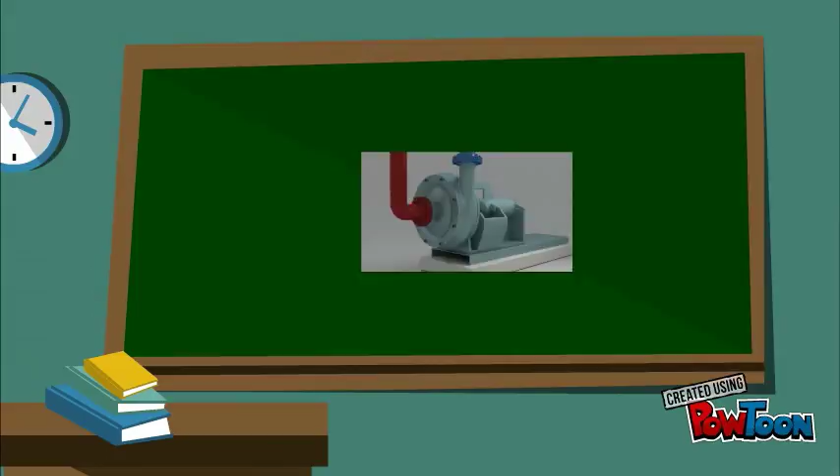First, we'll need a centrifugal pump, one like this used in most industrial applications. We're going to examine cross-sectional views so we can see just how this thing works.

Let's start with the parts of the pump. First we have the casing or volute, the eye or suction of the pump, the impeller, and the discharge pipe.

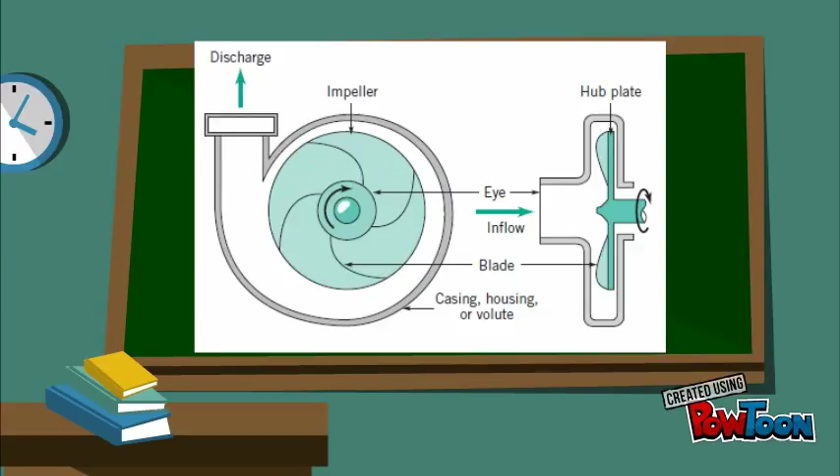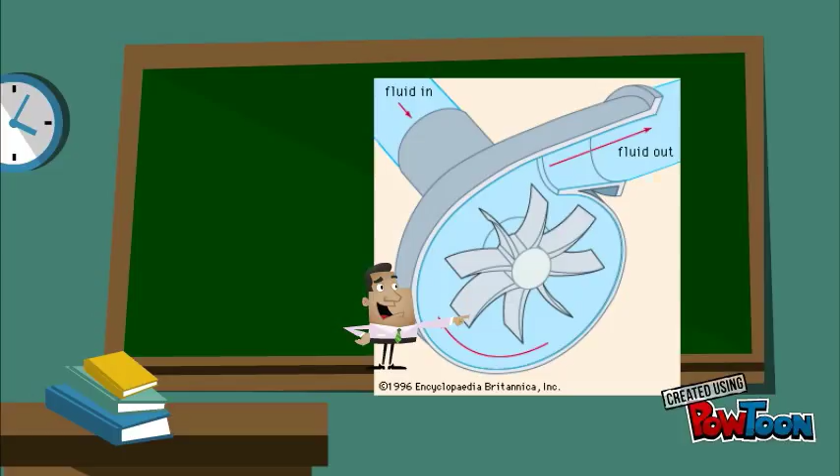For the basic operation, we see the fluid enters through the suction end here. Then it is pushed around the volute with the impeller here, until eventually it comes out here through the discharge end.

Let's look at pump theory. In this cutaway drawing, we can see that the fluid enters the suction pipe here and is forced to the outer casing here. You can see that the distance between the impeller and the casing gradually increases in size as the fluid travels around the volute.

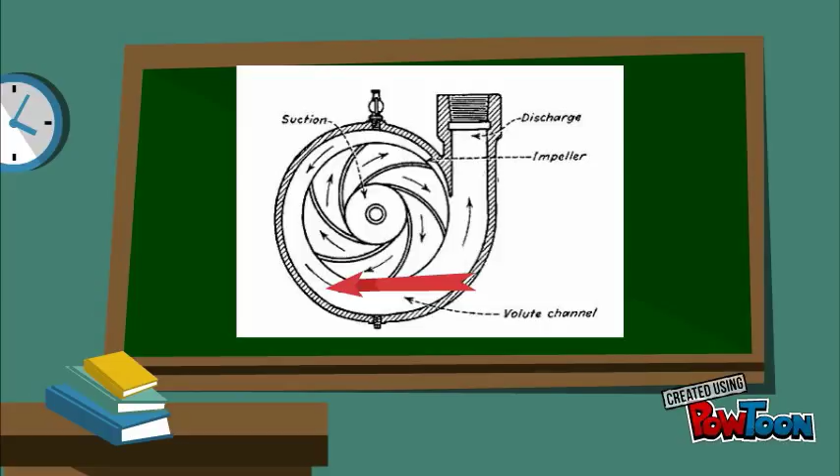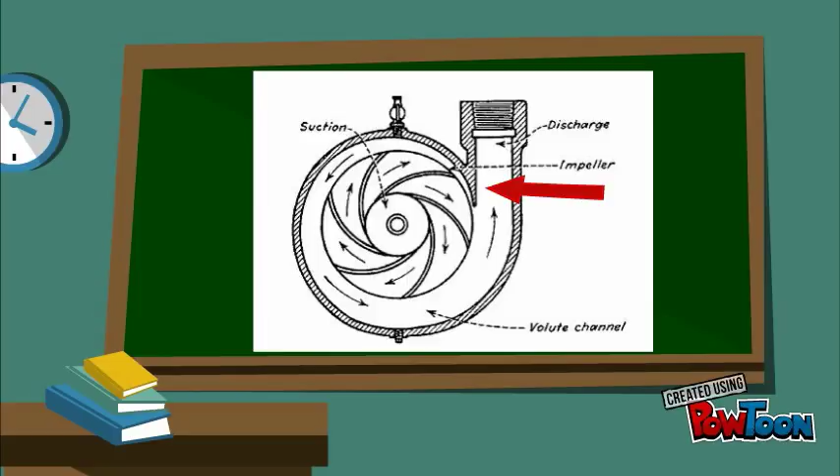As the fluid moves around and the distance increases, the velocity of the fluid decreases and the pressure increases. This is known as the Bernoulli principle. Bernoulli found that when fluid flowing in a pipe came to a narrow area, the speed of the fluid increased and the pressure decreased. And the opposite happened when flowing from a narrow pipe to a larger one. The speed decreases and the pressure increases.

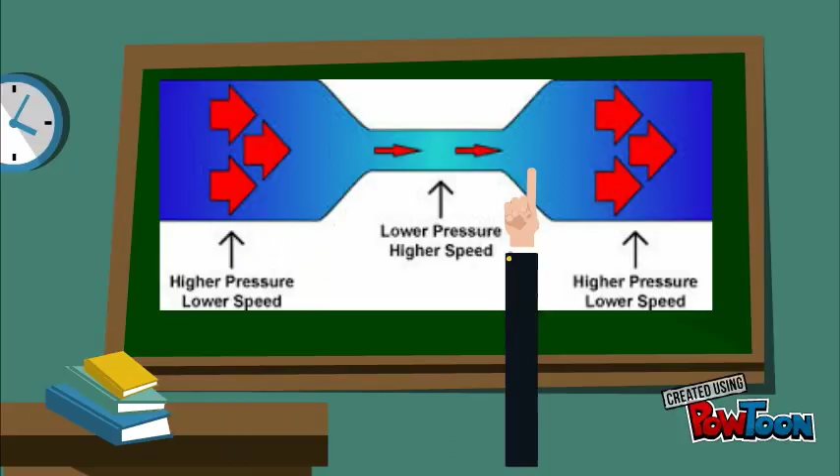You probably noticed the vanes on the impeller are curved. Paying attention to the direction of rotation, it appears they are facing the wrong way, and that they should cup the liquid instead. In fact, the reason for being curved opposite to what you might think is because it creates a smoother flow and pushes the water with less turbulence.